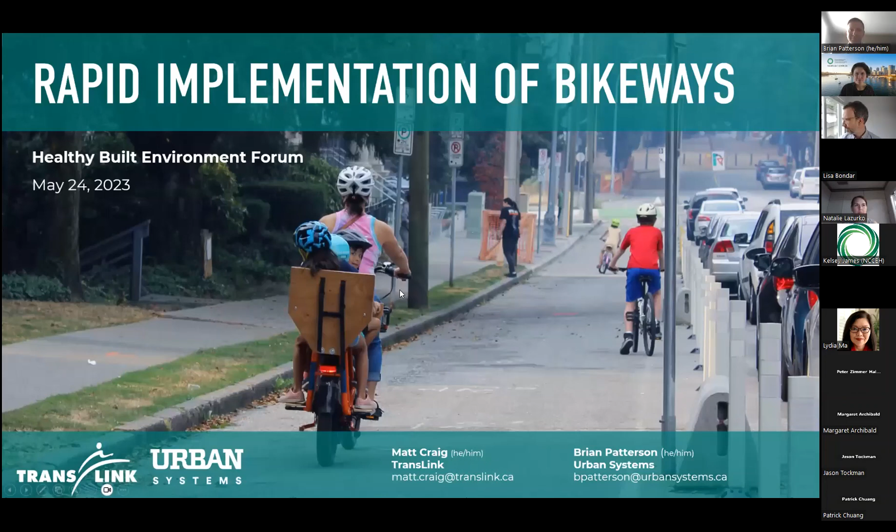Before I get started, I'd like to acknowledge that we aren't the only ones involved in this kind of work. Lots of folks behind the scenes, and I particularly want to recognize Lisa Bondar, a senior planner at TransLink, who led development of much of the work you'll see, together with Urban Systems.

Today we're focusing on rapid implementation of all ages and abilities bike networks. We'll walk through what that is, why you would do it, and how to do rapid implementation, and we'll leave some time for questions.

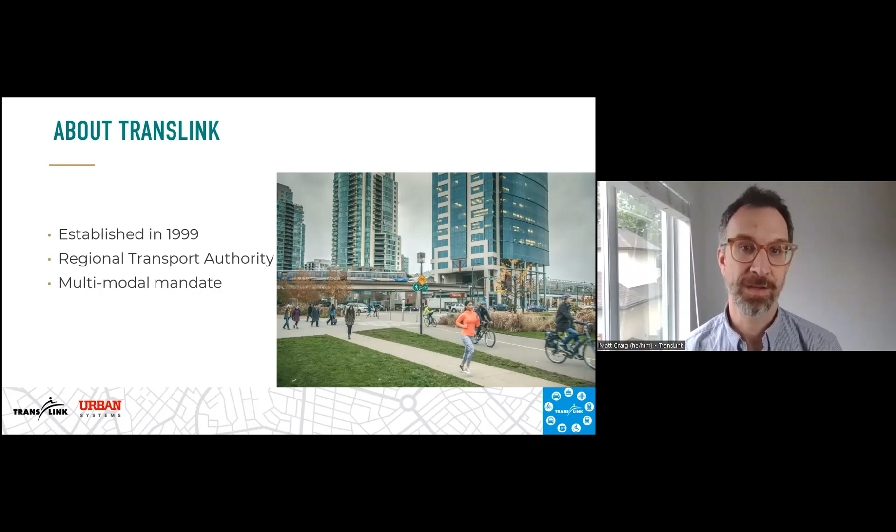On the street side, we fund the operation and maintenance of what we call the Major Road Network. As part of that, we partner with our local municipalities to invest in cycling and walking and making roads safer for all users. Next slide.

One of the ways we do that is we invest - last year we invested over 130 million dollars in over 100 projects led and delivered by municipalities across the region. While lots of these partnerships may fly under the radar, they're really essential for helping keep Metro Vancouver moving effectively, safely, and sustainably.

All of our work at TransLink, and within the region, is guided by Transport 2050, our regional transportation strategy. This is our 30-year strategy with specific strategies and actions to help get us to the next 30 years. It includes the overall theme of access for everyone, supported by 5 goals, each with specific targets - providing choices for everyone that are convenient, reliable, affordable, safe and comfortable, and carbon-free. Rapid implementation of cycling infrastructure really helps support nearly all of these goals. Next slide.

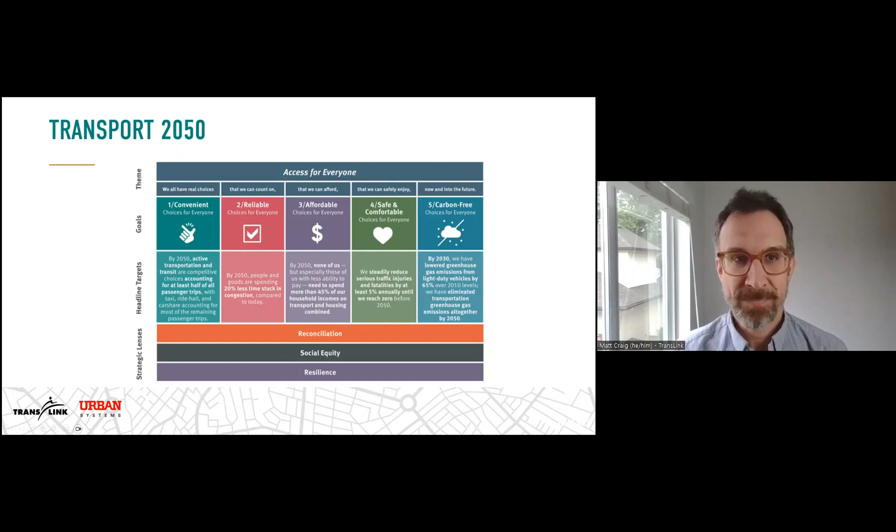Drilling down from our 30-year strategy, we've got another document, Transport 2050 10-year priorities, which is our blueprint for what would really be an unprecedented level of investment in transit and transportation in our region, helping achieve those big, ambitious Transport 2050 goals in time. So what do we need to do in the first 10 years?

These priorities were approved by our Mayor's Council last summer and are grouped around three main themes: convenient, reliable, safe, and comfortable transit; people-first streets; and building out a reliable and fast transit network. The work we're doing now is to develop our next set of investment plans, which will confirm the funding

and the prioritization for delivering on these 10-year priorities. Throughout the development of both Transport 2050 and the 10-year priorities, we heard from the public and from our decision makers that urgent investments are needed. We need to move quickly. So our 10-year priorities recommend we build out half of what was identified in our 30-year strategy in the first 10 years, including half of a safe and comfortable major bikeway network.

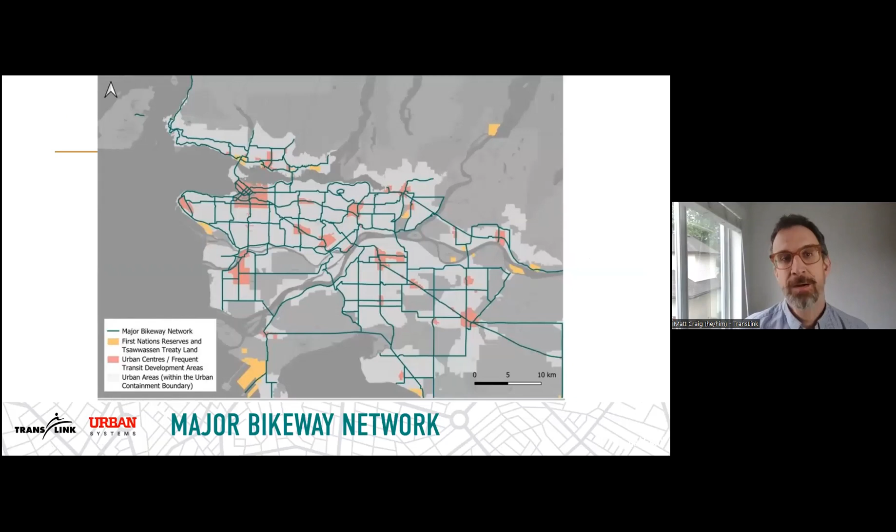Transport 2050 took a concept that was previously in our regional cycling strategy, which has been a basis for our municipal funding program, and confirmed it into what we've called the major bikeway network. This is 850 kilometers of safe and comfortable corridors connecting both between and within regionally designated urban centers.

To help catalyze investment in cycling over the last few years, we've adapted our existing municipal funding program to include a specific stream focusing on rapid implementation. It's resulted in two great outcomes: new, safe, comfortable infrastructure, and also an opportunity to work with our municipal partners on how we apply this new approach.

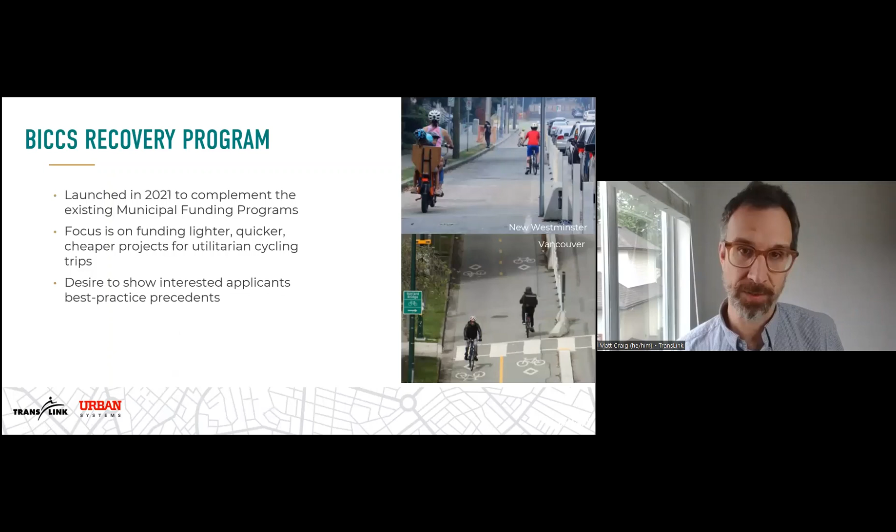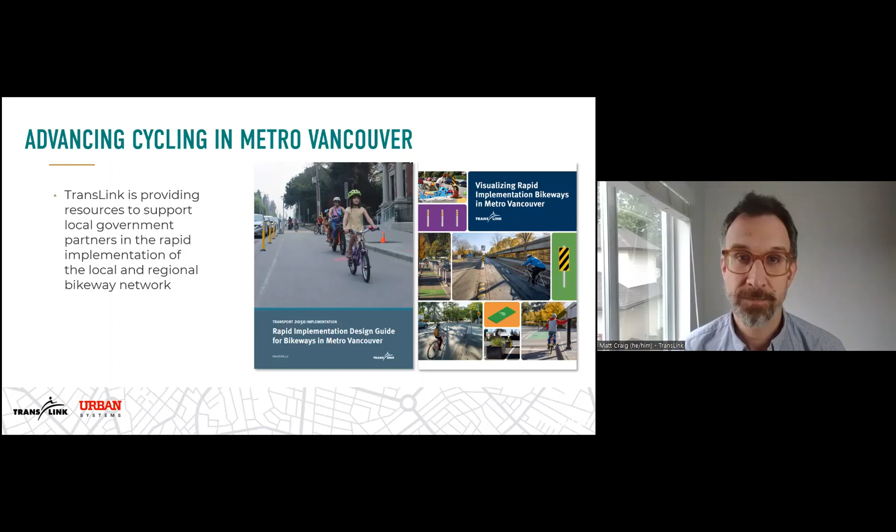One of the ways we've done that to help support advancing investment in cycling is by doing more than just providing funding—we're also helping to build capacity. This includes providing resources like the Rapid Implementation Design Guide, which we're going to share some more information about. So what is it? What's rapid implementation?

Over the last few years, cities across Canada and throughout the world have increasingly shifted their approach to delivering bikeways by following a rapid implementation, or sometimes called a quick build, approach.

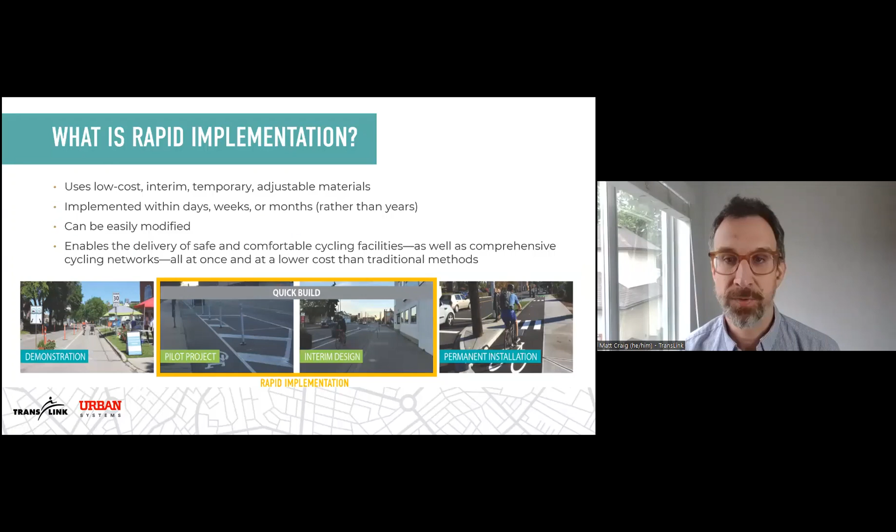These networks have often been implemented really quickly using approaches that focus on low cost, interim, temporary, and adjustable materials. In our region, some recent examples include Beach Avenue in the City of Vancouver, and in the City of New Westminster, the Agnes Greenway—both of which we'll hear a little bit more about from Brian.

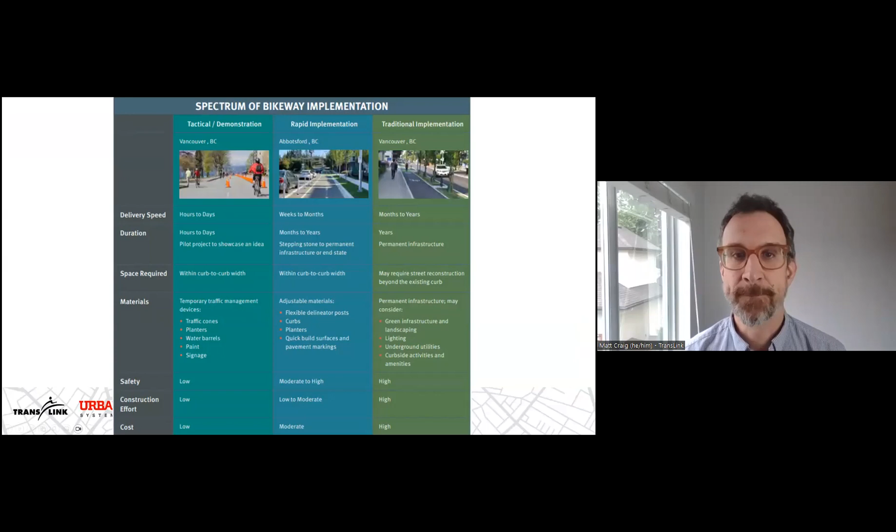So three main things define these. Rapid implementation is fast—it's right in the name, rapid. What that does is help minimize the construction impacts on the community. They get out there quickly.

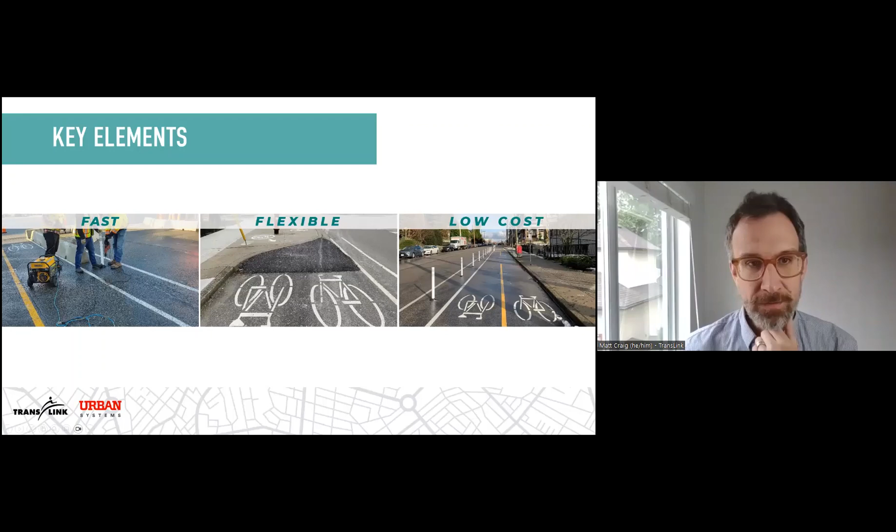They're also flexible, using flexible materials that allow changes as needed and help adapt to challenges as they come up. And finally, they're lower cost—using lower cost materials that make procurement and implementation easier and quicker, ultimately allowing more rapid expansion of the network. You can get more kilometers for the same dollars.

So why even do it? We all know there are many critical issues facing our communities, and the rapid implementation approach has become increasingly important during the pandemic. Cities around the world quickly reallocated road space to meet physical distancing requirements and provide safe access to daily needs and outdoor recreation, recognizing changes in how people are getting around and the mobility patterns we're seeing in our cities. The pandemic then exacerbated existing urban issues like climate change, public health, road safety, and social equity. Rapid implementation of cycling networks is a key strategy cities around the world can use to address each of these issues by being fast and urgent.

Another reason to work on this is we don't always get it right—we don't always know the answers. Rapid implementation gives us a great opportunity to try things out, to monitor and adjust designs as needed based on feedback and users' lived experience. It also requires communities to be willing to take more risks and make mistakes and learn, while being committed to making adjustments based on what we do learn.

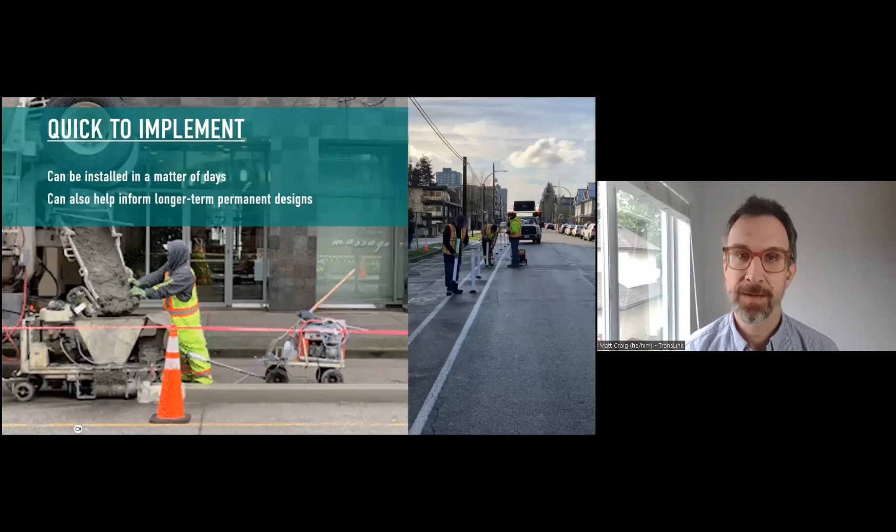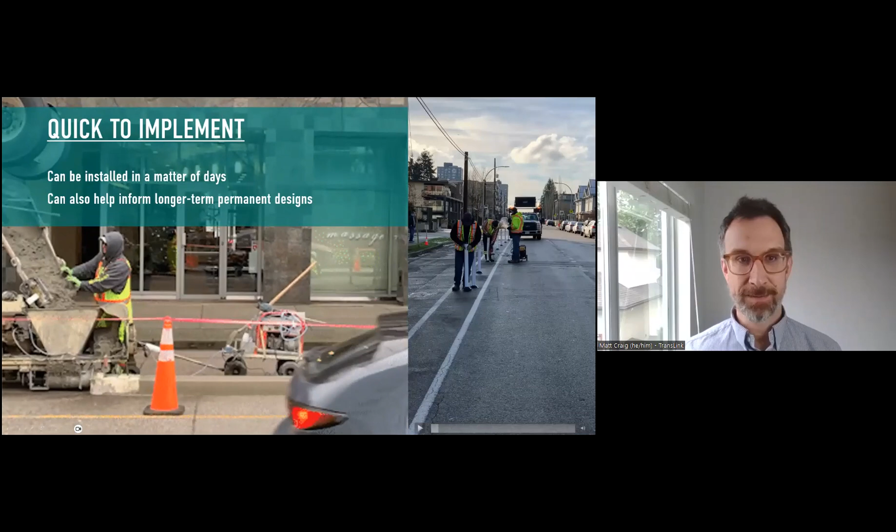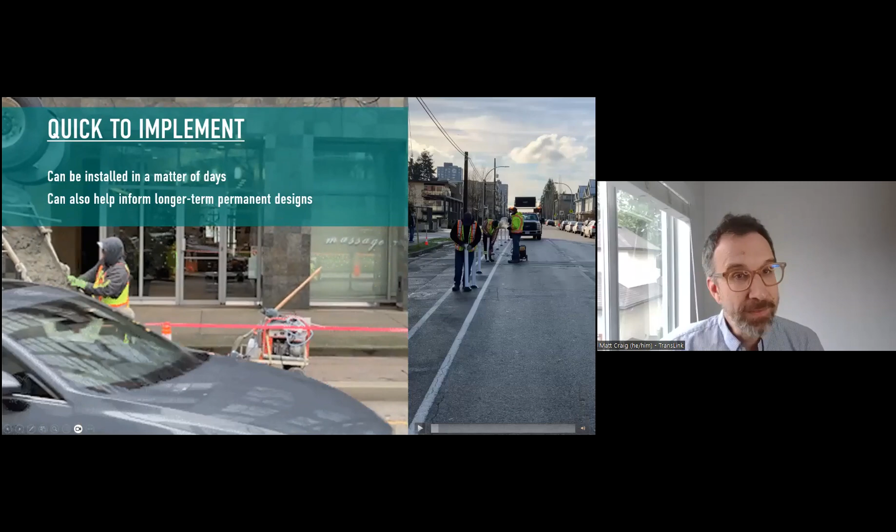Oh, I love the video on this one. It's quick to implement—it's right in the name—and with that comes a lower cost. We know we need urgent action on climate change, and encouraging active transportation by rapidly expanding safe and comfortable networks is hugely important to achieve that goal. It can also help inform longer-term permanent designs: we get something out there, we learn from it, and then we build for more permanence.

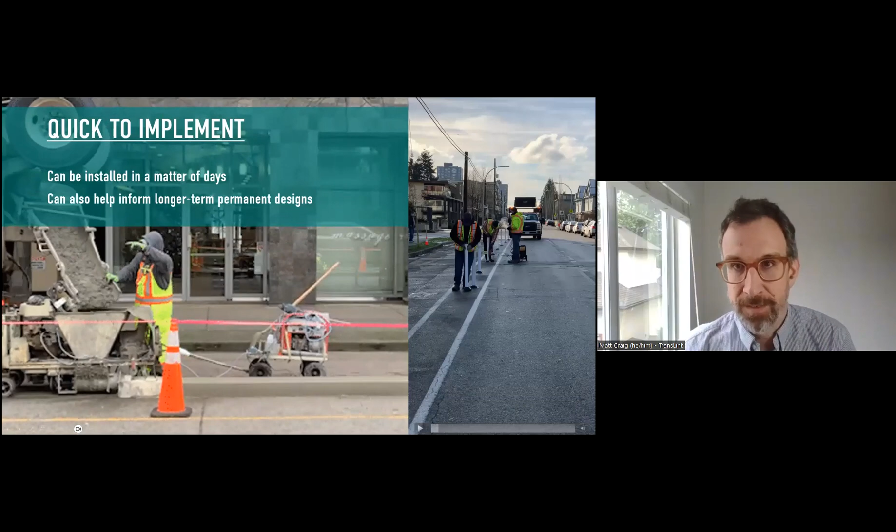It can also be a really powerful engagement approach. Rapid implementation gets things built, gets things out there, and it's an opportunity to interact directly with the project and the infrastructure, and then provide input as we're designing and as we iterate during implementation. Getting people out there to test walk or test bike a design can be hugely beneficial with this kind of project.

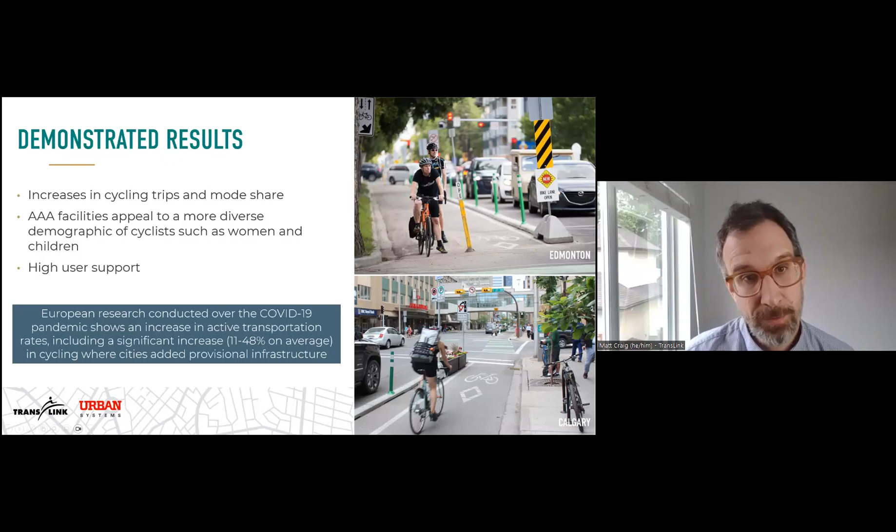A few words on the benefits of rapid implementation. There's been successful examples all across North America, including here in Canada, in Calgary, Edmonton, and Victoria, and many others. Rapid implementation has also taken off around the world. Many European cities have been investing in this approach, and they're seeing great outcomes, particularly in measured growth of active transportation rates.

Here in Canada, it's important to recognize we're certainly not the first here in Metro Vancouver, and we're not the only ones doing this. Calgary and Edmonton both pioneered this concept of rapidly implementing downtown bike networks. In 2015, the Calgary Cycle Track Network project saw cycling trips triple compared to 2014. In Edmonton, they rapidly implemented the downtown bike network, a pilot project that saw an 81% increase in downtown cyclists year over year. And in Toronto, a similar project had increases of 65% across 7 new routes, all of which were then made permanent.

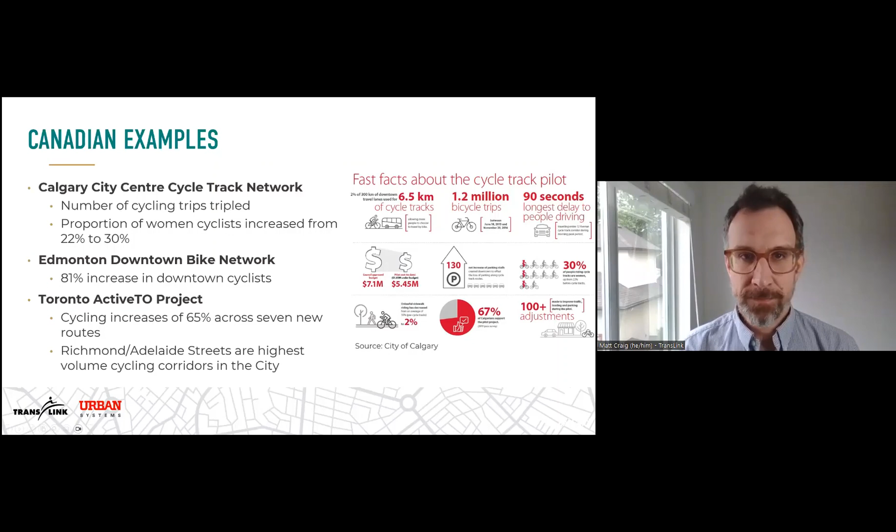Next slide, and I think that's over to Brian to walk you through the design guidelines we developed, and got some great photos to show what some of these look like. So over to you, Brian.

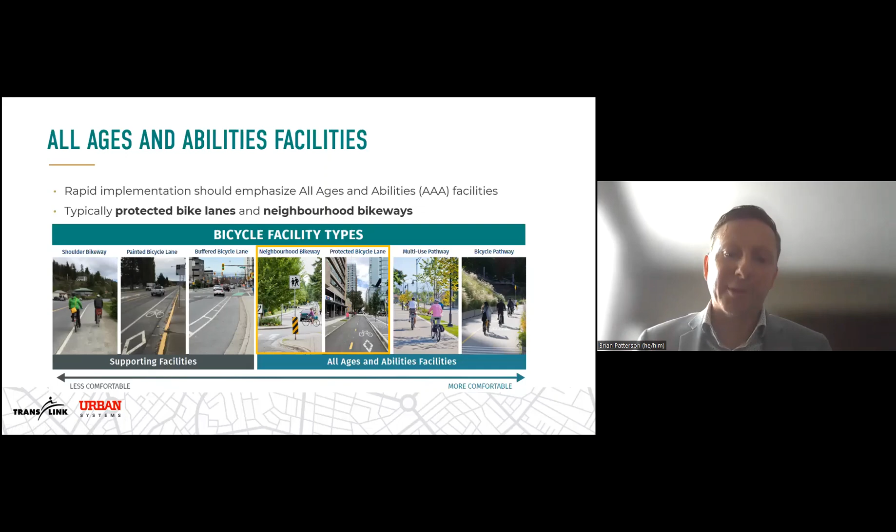And then on the left are other types of bicycle facilities that aren't AAA. So we're really zooming in here on AAA treatments using a quick build approach on neighborhood bikeways and protected bike lanes.

One thing we often hear about rapid implementation is that sometimes you're using a lot of concrete barriers or flexible delineator posts and things like that. But it's important to recognize that rapid implementation does not mean lower quality. This is an example of the Adanac Street Bikeway in the city of Vancouver, a quick build approach on a local street bikeway. They used an activation with a number of interim materials and features that have several placemaking elements, things like a mural, creative seating, table tennis, and skate dots, or skateboard-friendly elements. These elements help actually restrict and divert motor vehicle traffic. This used to be a connection that motor vehicles could use. They closed that connection off and created a separated facility using really low-cost materials, but added in some of those placemaking elements as well.

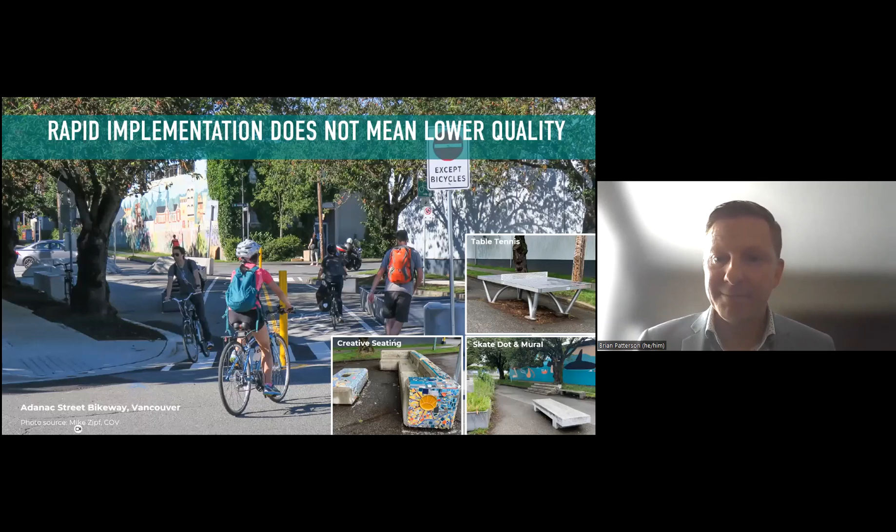There's some design guidance available both locally and provincially and nationally, ranging on a spectrum from more tactical types of projects through to permanent types of projects.

On the tactical side of things, if anybody's familiar with the term tactical urbanism, look at some of the interventions a lot of cities did immediately at the onset of the COVID-19 pandemic, using really temporary and quick build materials. These are types of materials that would have been implemented in a matter of hours or days, but they aren't really permanent. They were only intended to be out there for a short period of time, looking at really short-term interventions.

There's a couple of design guidelines out there for the tactical side of things. The Federation of Canadian Municipalities published a COVID-19 street rebalancing guide, and TransLink also developed a tactical urbanism toolkit to provide guidance on that spectrum.

On the other end of the spectrum, there's quite a bit of guidance available on permanent or more intensive reconstruction and development of bikeway facilities. The Transportation Association of Canada has a national design guide called the Geometric Design Guide for Canadian Roads, and in British Columbia, we have the British Columbia Active Transportation Design Guide.

But what some of these guidelines are missing is what we're going to be talking about today, doing a bit of a deeper dive specifically on the topic of rapid implementation, which really fits in between the tactical and permanent side of things.

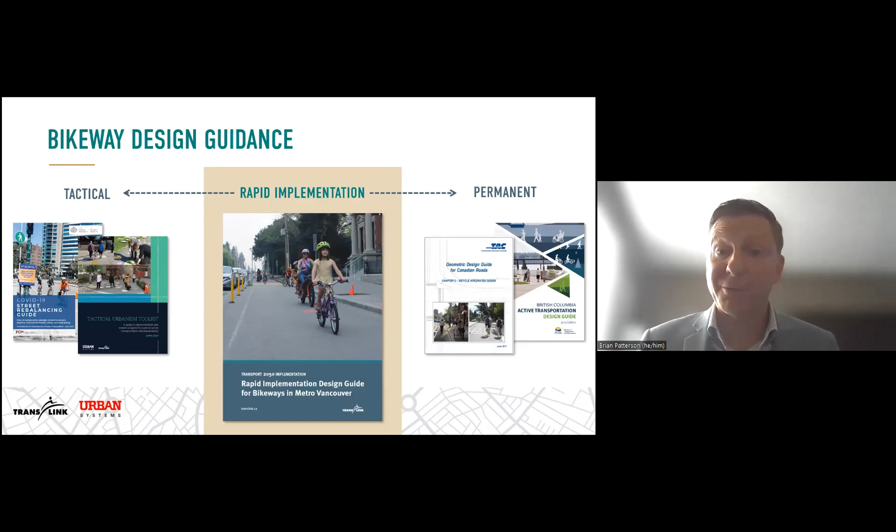What we're going to be focusing on for much of the presentation is the Rapid Implementation Design Guide for Bikeways in Metro Vancouver, which we worked on with TransLink and was released in November 2022. The guide focuses on treatments using flexible, low-cost materials that are implemented rapidly within the existing roadway and with minimal construction requirements. By filling that spot in the middle, it's filling a gap in existing knowledge and research and guidance on how to actually provide these facilities using a quick build approach.

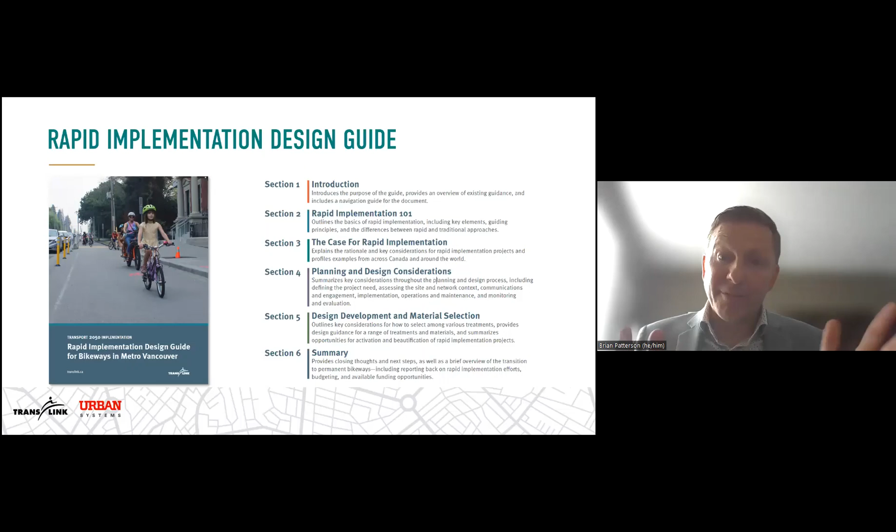This guide is available on TransLink's website for free download. It has 6 different sections, and we'll essentially walk you through a number of the sections in the design guide. There's an introduction, a rapid implementation 101, which is largely what Matt was speaking to earlier, the case for rapid implementation. What I'll be focusing on in the next few slides is getting into more detail about some of the key planning and design considerations, and then when you're actually implementing bikeways, what types of treatments or materials you can consider, and what are some of the advantages and disadvantages of those different types of materials.

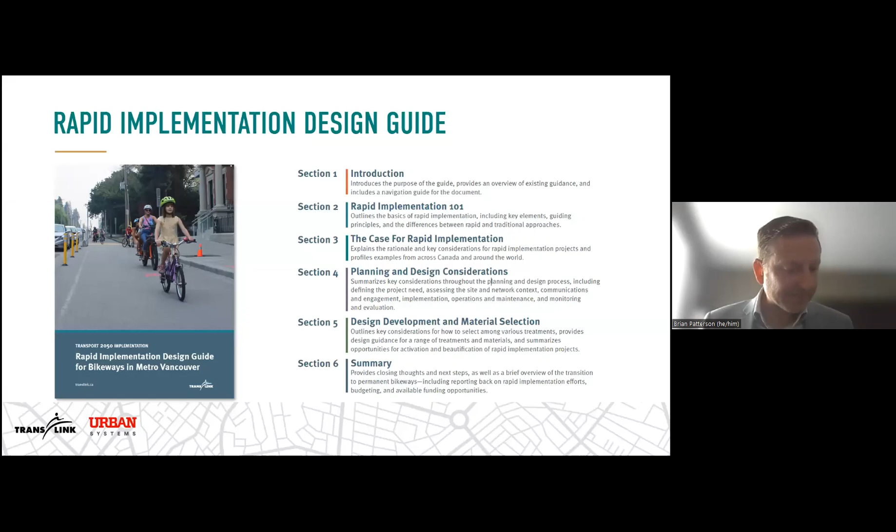We'll start with getting into some of the planning and design considerations if you're looking at implementing bikeways using a rapid implementation approach. The guide outlines a number of guiding principles you should be thinking about if you're interested in moving forward with a rapid implementation project, recognizing rapid implementation is a powerful tool that can be used for quick and effective change, but it also has the potential to be disruptive or negatively impact certain users and services if not properly planned. As a result, there's a number of guiding principles to help make sure we're thinking about the needs of all road users and how to plan and design these successfully to minimize any adverse impacts.

Looking through some of these guiding principles, the first one is social impact and social equity, noting that rapid implementation projects can impact a wide range of street users. In many cases during the early days of the COVID-19 pandemic, a number of cities throughout North America and Europe were really focusing on social equity to help identify where they could place rapid implementation projects to have the greatest equity benefits and benefit the greatest number of people from an equity perspective.

The next one is accessibility. Accessibility is a fundamental consideration for any project, but is especially important given the rapid nature of change with a quick build project. So rapid implementation projects should prioritize universal design considerations at all stages of planning and design and include accessibility stakeholders in the planning and design process.

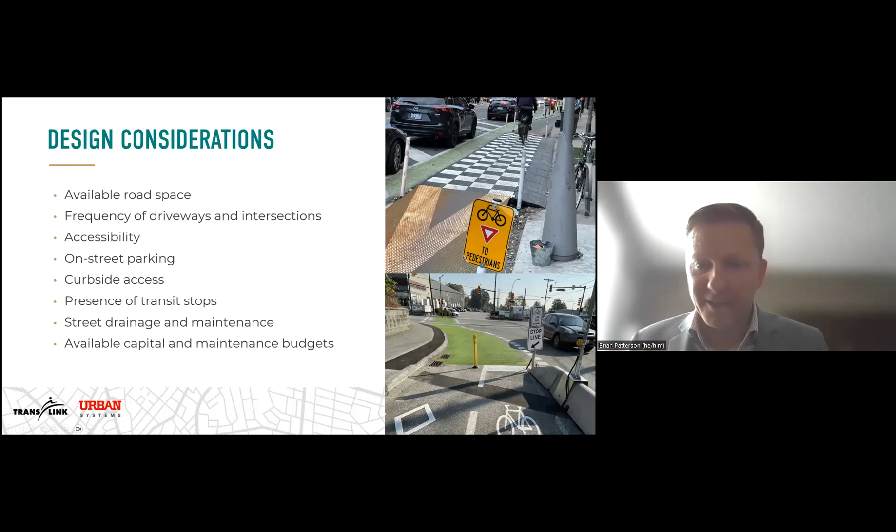And then on the bottom photo is an example in Burnaby, where they were looking at quick build approaches to intersection modifications as well. On top of a concrete roadside barrier, adding in some signal changes with a pedestrian and bicycle activated push button to be able to trigger the traffic signal.

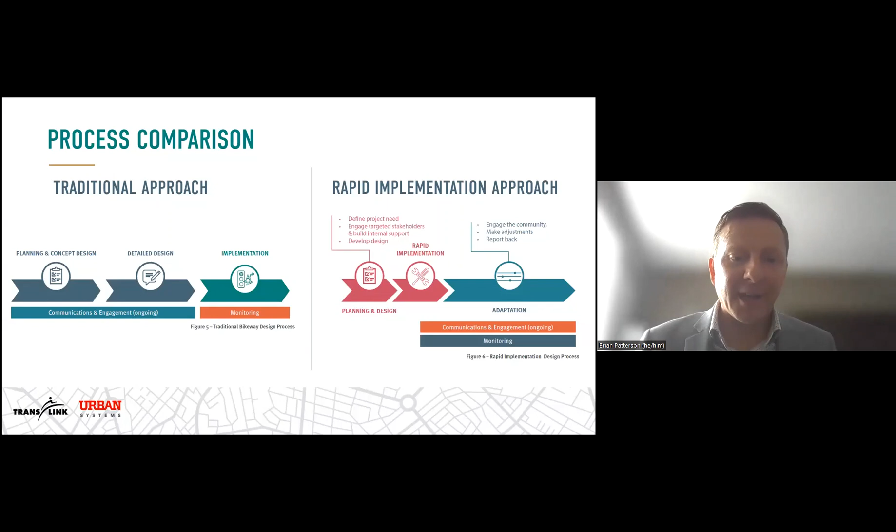Rapid implementation also follows a different design process than what we'd typically be used to in local governments. On the left is what we'd call a traditional approach, which municipalities often take in the planning and delivery of major capital projects. This traditional approach moves from a planning and concept design phase through to detailed design and through to implementation, a linear process that involves each of those phases along with communications and engagement, but it's often a multi-year process to go through that three-step process.

The rapid implementation approach is quite a different approach, aimed at getting infrastructure on the ground much faster, from weeks to months instead of years. Its approach uses targeted engagement and follows a condensed planning and design process. That's what you see in pink there: really looking at some initial planning and design, identifying what the project need is, engaging with some targeted stakeholders but not broad public engagement, and then developing a design quickly and focusing on implementing that design.

And then your broad public engagement actually happens after you've gone through that rapid implementation. That way you're really getting people's lived experience—they've had a chance to actually try the facility, use it, see what's working or not. But it requires, as Matt said, the local government to be committed to hearing that feedback, committed to actually making changes and adapting based on the input received, and reporting back to the community about how that input was used to make those adjustments.

Communications and engagement is really an ongoing part of the adaptation phase, as well as ongoing monitoring. So doing some post-installation counts as well, and making adjustments, because these are low-cost adjustable materials, to respond to the issues that you might identify.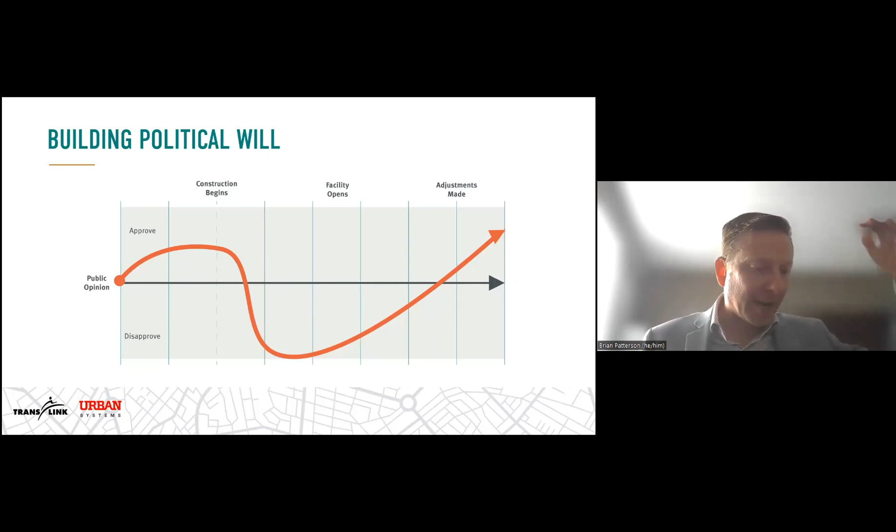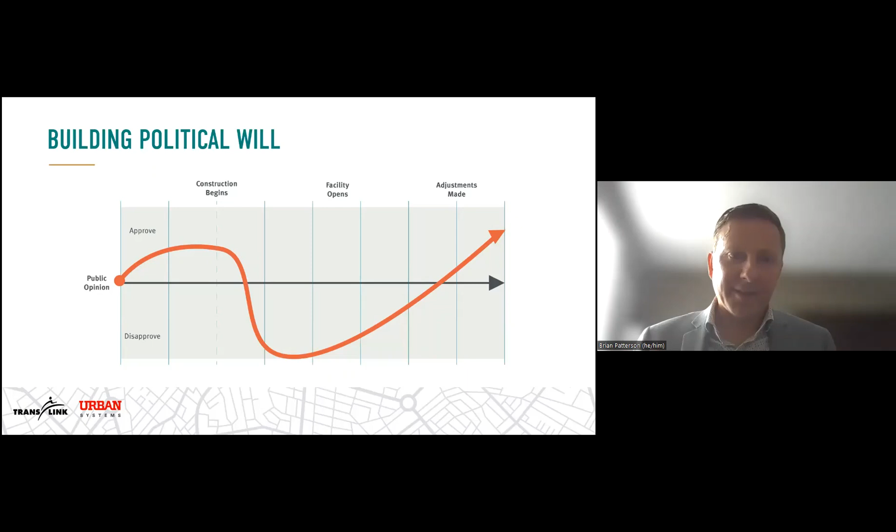But over time, as the facility opens and people try it out, experience it, and learn to adjust their own behavior, approval tends to increase, especially if those adjustments are made in response to the engagement and input received. So it's an important commitment, and you need to have a longer term view, listening to the concerns you might hear when you go into that valley, but being committed to that longer term view and responding to what you're hearing and learning from it to keep the project moving forward.

So those are some broader planning and design considerations. Now I'll talk more specifically about some of the engineering treatments and the treatments and materials you could look at when implementing a rapid implementation project.

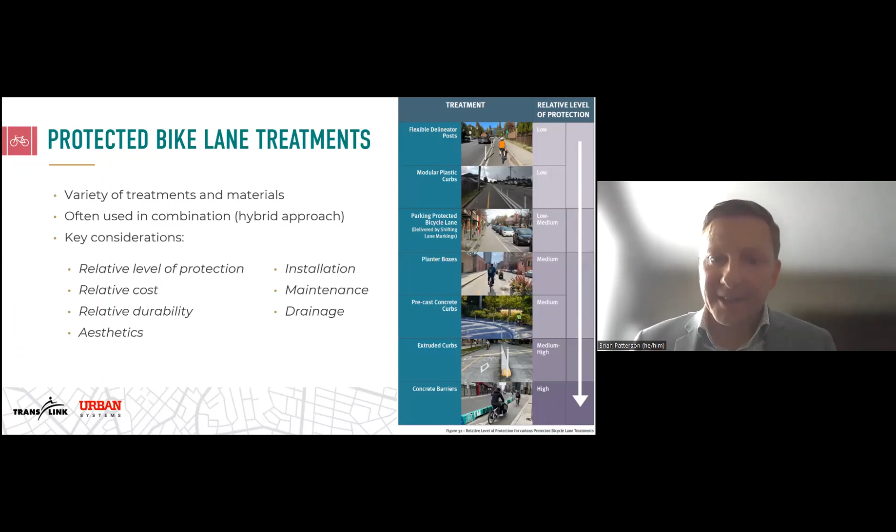There's a number of different treatments that can be used, and I'll walk through each of them briefly. There are advantages and disadvantages to each type of treatment, and the design guide outlines a lot of these, thinking about key considerations like the relative level of protection, how safe and comfortable the protection is, the relative cost, relative durability, aesthetic considerations, installation considerations, and maintenance and drainage considerations. The guide goes into quite a bit more detail about each of these for each type of treatment.

On the right you can see this isn't an exhaustive list of treatments, but these are some of the more common types we've generally seen in Metro Vancouver and elsewhere in North America. This graphic shows a bit of a spectrum of treatments that can be considered based on their relative level of protection.

At the lowest level here we have flexible delineator posts, which are helpful in making a more comfortable facility by providing some physical separation, but especially on higher speed or higher volume roadways, they don't offer a high degree of physical protection. If a motor vehicle were to hit a flexible delineator post, it wouldn't necessarily provide a high degree of safety, but it does make it more comfortable and can be effective at getting more people cycling. This can range down to things like curbs or concrete barriers, which can be more expensive and have other considerations, but offer a higher degree of protection.

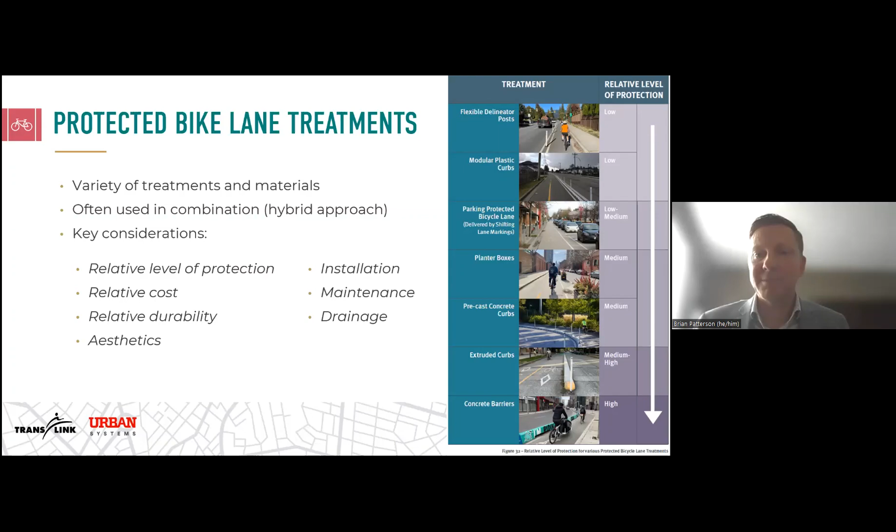The type of treatment you use comes down to a lot of the considerations I outlined earlier, a main one being your capital cost and maintenance budgets, the conditions of the roadway, and what's the most appropriate type of treatment. I'll quickly walk through each of these different types of treatments, and with some larger photos you can get an example of what each of these looks like.

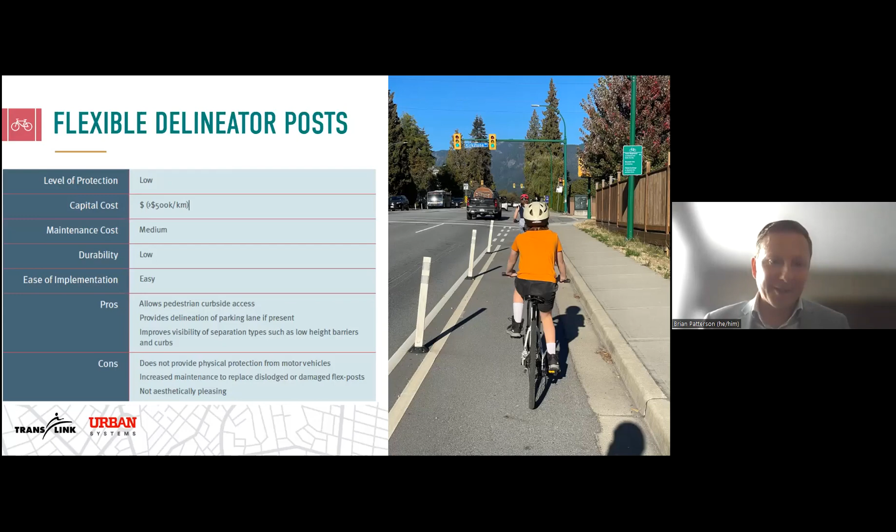This example here is looking at a type of protection with a lower level of protection when we're looking at physical safety, but it can still offer a degree of comfort. This is actually my son in the district of North Vancouver riding along the bikeway, and he feels very comfortable with these flexible delineator posts. But as I mentioned, they do get knocked over if a car hits them, and so they actually have fairly significant maintenance costs just because of the replacement costs that go along with them. They may be initially quite inexpensive to install, but they have an ongoing cost that goes along with them. They're not very durable, but they're easy to implement, so you can see some of the pros and cons of these treatments here.

If we move up a step, you could have a flexible delineator post with a bit of curbing. This example is a modular plastic curb, offering a fairly low level of protection if a vehicle hits it, but provides a level of comfort. It's nice because it provides a continuous barrier as opposed to individual flexible posts, with a bit higher capital cost and moderate maintenance costs. It's fairly durable, but not as durable as permanent curbs or barriers, though very easy to install.

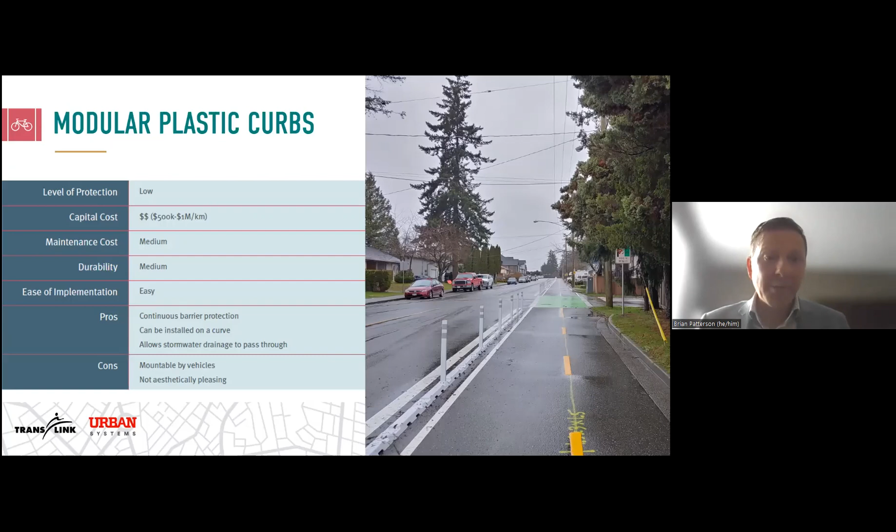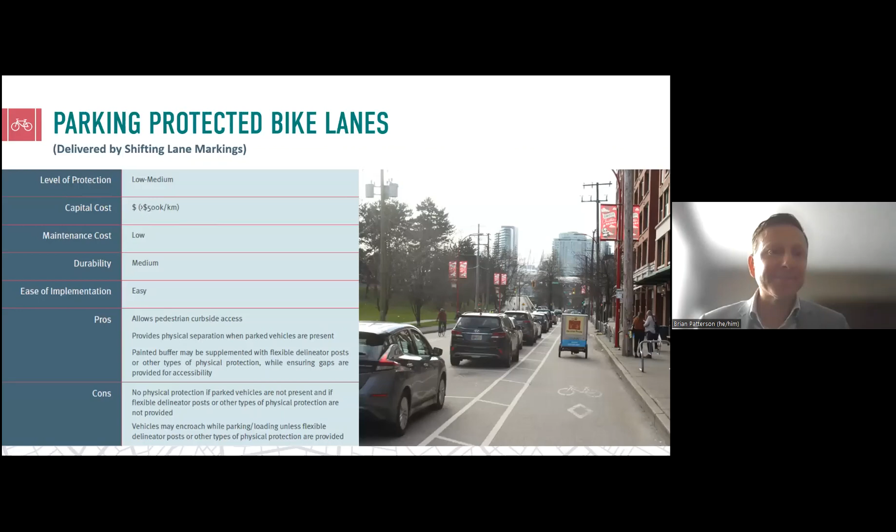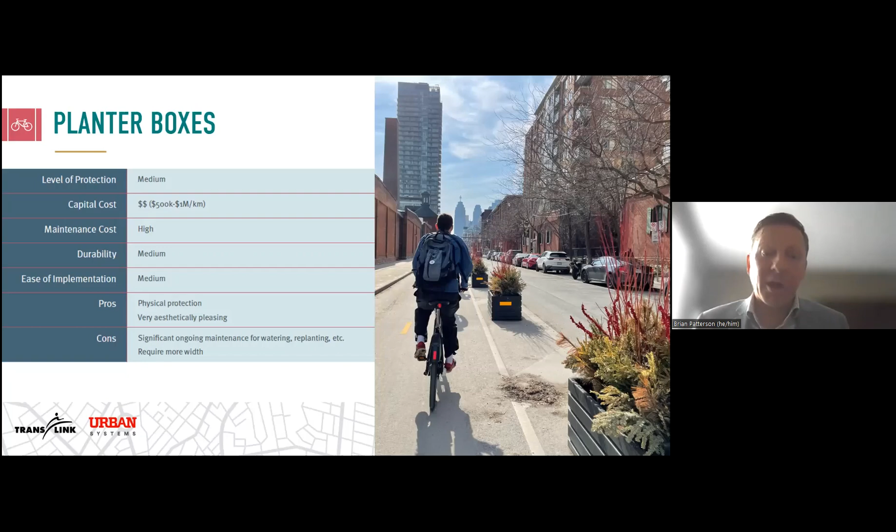As we move up the spectrum into treatments with a higher degree of physical protection using curbs, there's two different types the guide goes into. This example is using precast concrete curbs, a moderate level of protection, a bit higher cost, but the advantage is that it's much more durable and offers a greater physical degree of safety. But there's considerations like stormwater and drainage and how that passes through the curbs.

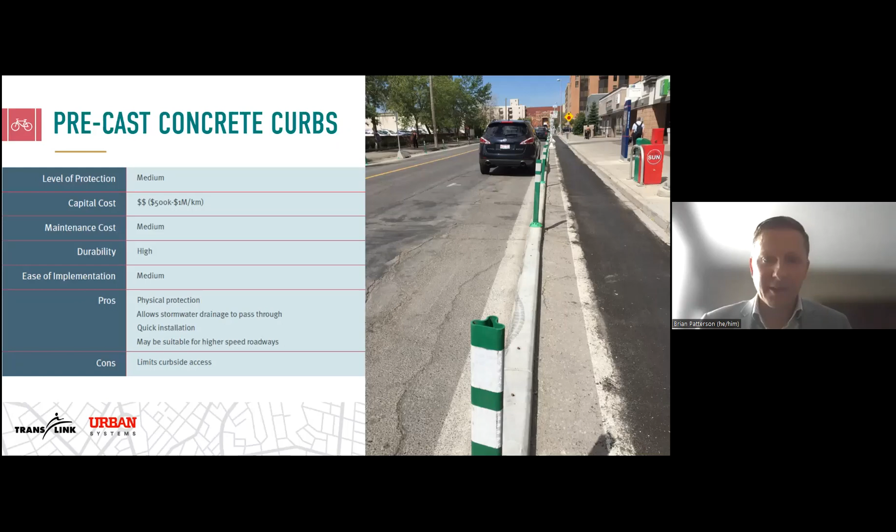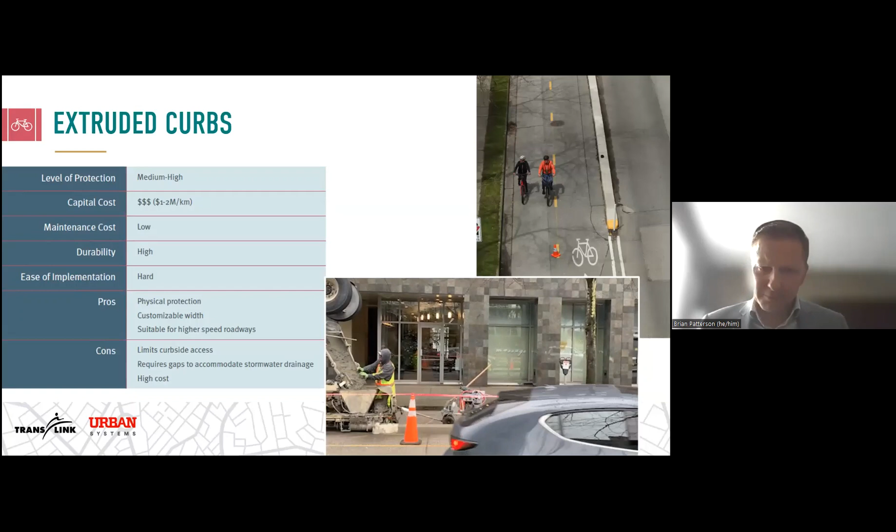The final one is looking at concrete barriers. This has the highest degree of protection, something you might look at if you have higher volume or higher speed roadways, but with higher capital costs and other considerations. Concrete barriers on their own aren't the most aesthetically pleasing, but you can see this example from Toronto where they worked with artists and commissioned paintings of those concrete curbs to add public art to the streetscape.

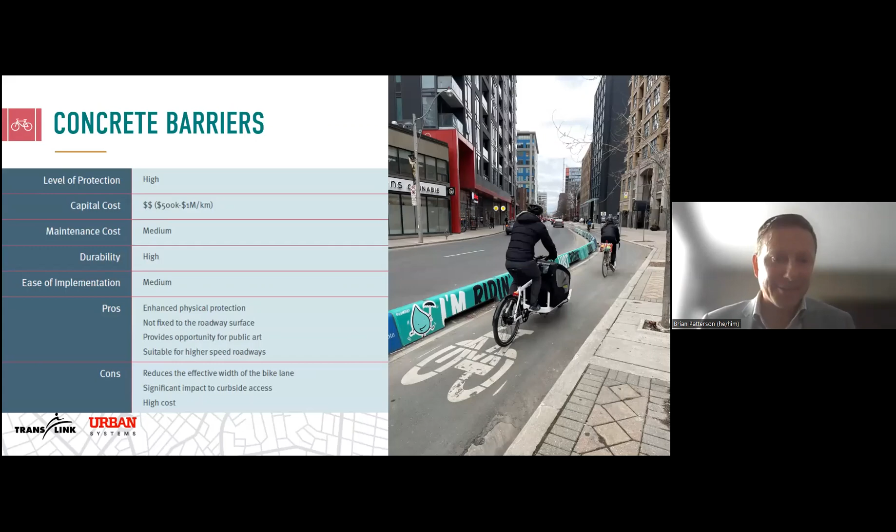So this is a summary here. I won't go through the table, but it shows some of the comparisons, how these different treatments work side by side, and what some of the pros and cons are to help your planning and decision making.

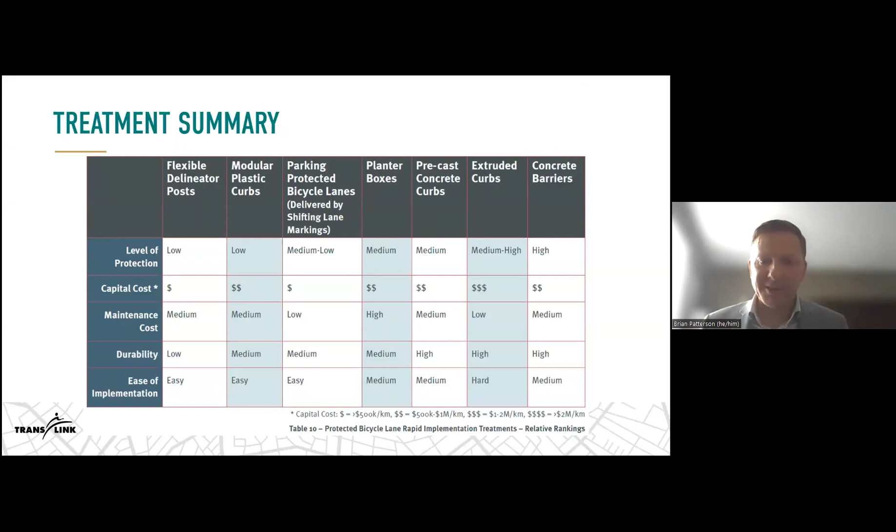There's also opportunities using neighborhood bikeways. What I was speaking about earlier is really what you'd do on busy roadways with protected bike lanes. But if you have low volume, low speed streets and you're looking at traffic calming or traffic diversion, you can use many of the same tools to provide rapid implementation.

If you're doing things like a road closure, converting a two-way street to a one-way street, diagonal diverters, or median islands, there's opportunities to use low-cost materials like the example on the bottom right with concrete barriers and flex posts to provide a physical restriction for vehicle traffic while allowing bikes to move through the space. In Toronto, the example on the left, they've used traffic cones and flexible posts, adding planters and paint on the street, along with a bike share station.

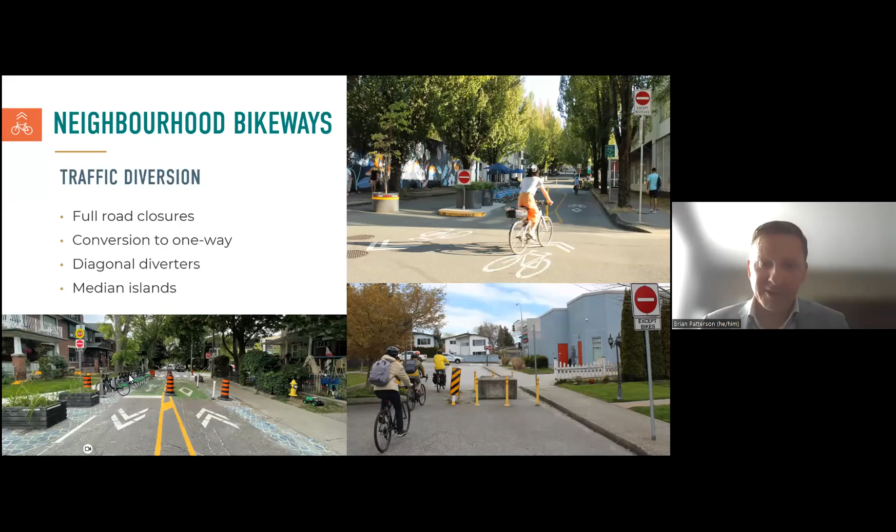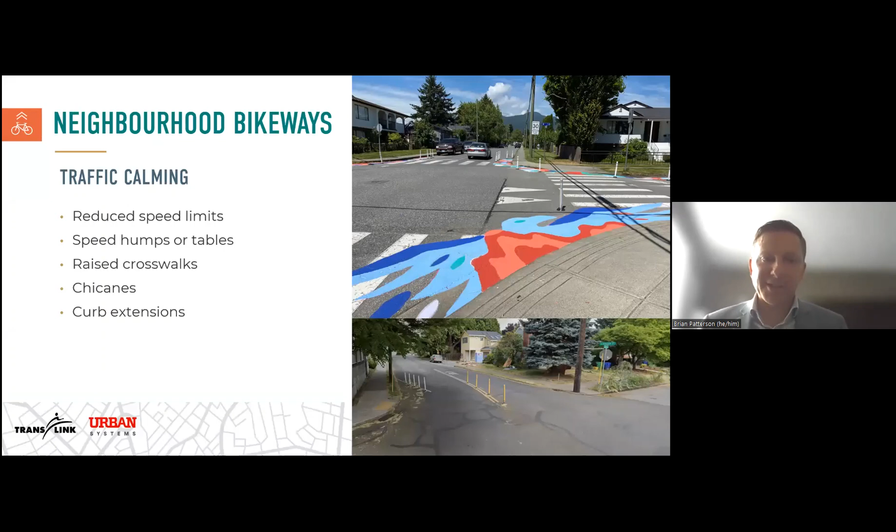These are some other examples of traffic calming where you can enhance the streetscape with things like speed humps, tables, raised crosswalks, or curb extensions, as you can see, and adding some paint in the example here.

Beyond the engineering considerations and the physical types of treatments, this is the piece that gets me really excited, the opportunity to make really interesting and beautiful spaces and lots of opportunities to add creative elements to the street.